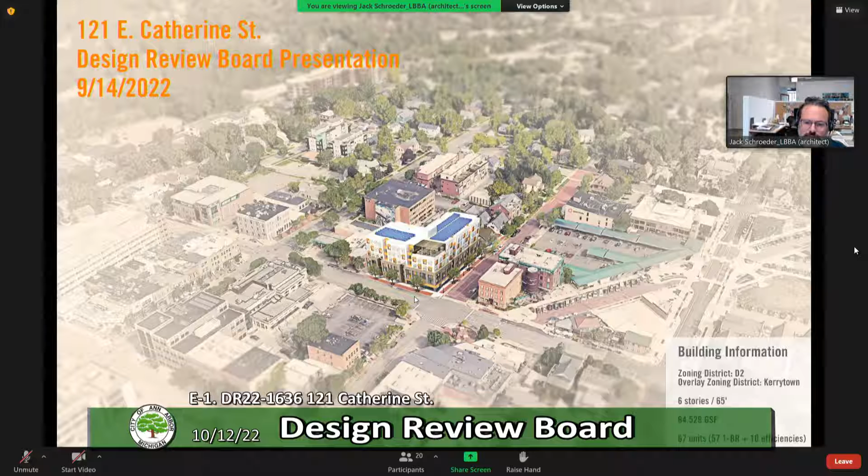A few photos - I'm sure you're all well aware of the space, but just to walk through it quickly: this is the alley behind our site off of Catherine. This is the view along Catherine, obviously just a parking lot now with the city, with these low brick knee walls. And then 4th Ave is the historic brick street with two entry points to the existing parking lot, and we're eliminating one of those.

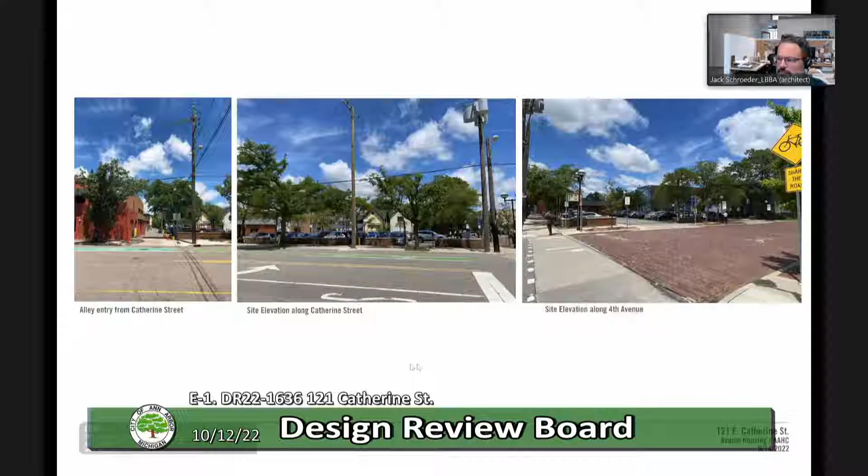These are just more broad context shots - the idea of scale, the idea of material, even the way the openings march down the facades was something we were looking to pull from, not necessarily replicate, but have a similar kind of rhythm at our street front.

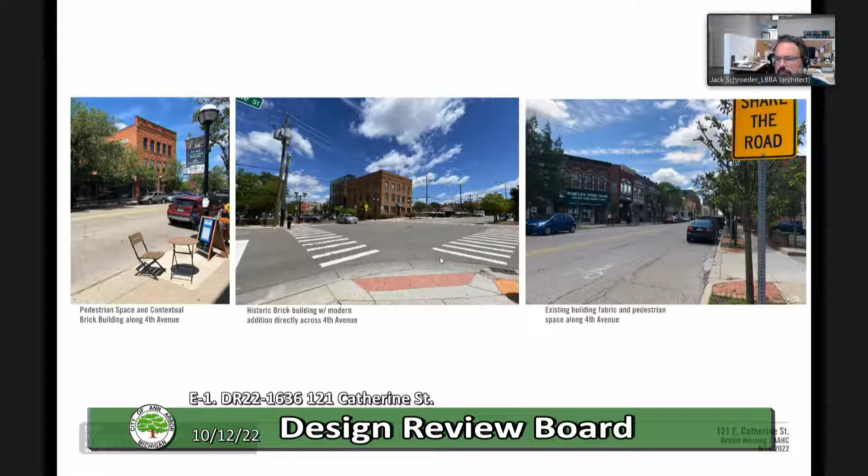Jumping into some imagery, we have masonry up to the 3rd floor, and then the building steps back. The additional 3 stories above are more modern, a mix of white and some kind of bright pop of color. At the base, we know we're a larger building filling up this corner, so we've broken the mass of that brick portion down in different spots along the facades.

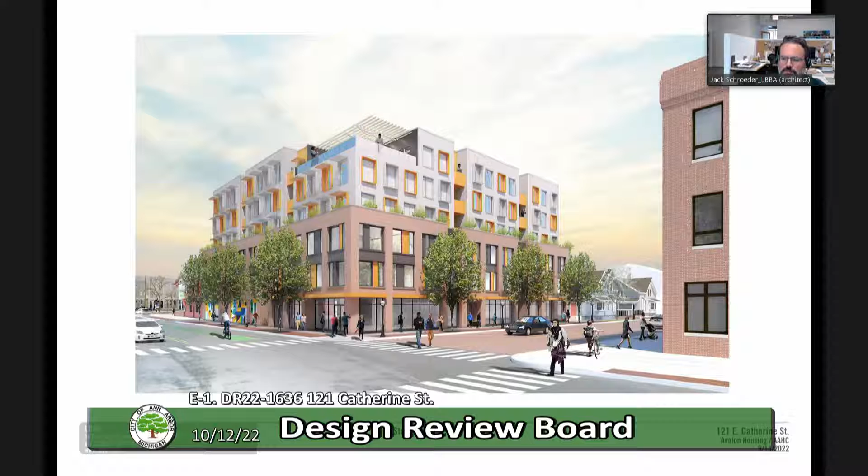This is that kind of repeating window bay. We've made the windows bigger, a little more modern, a little newer, but we're still doing this repetitive rhythm. Obviously, we're doing as much storefront as we can at the base, acknowledging the vibrancy of the surroundings.

I'll keep marching through here. This is a bit more above our site, highlighting the roof deck and community room that residents will get to use. It's kind of rare in affordable housing, but we're actually providing some private porches and a shared porch - people will be able to access these lower pieces as well. We love the idea of providing some connection to the exterior for these future tenants.

This is maybe a little overambitious on the solar up here - once we finish our mechanical design, we'll see where we land. But obviously the building is going to be all electric, highly sustainable, partially to fit within Ann Arbor's guidelines, but we're striving to take it even further. So we're really excited about that as well.

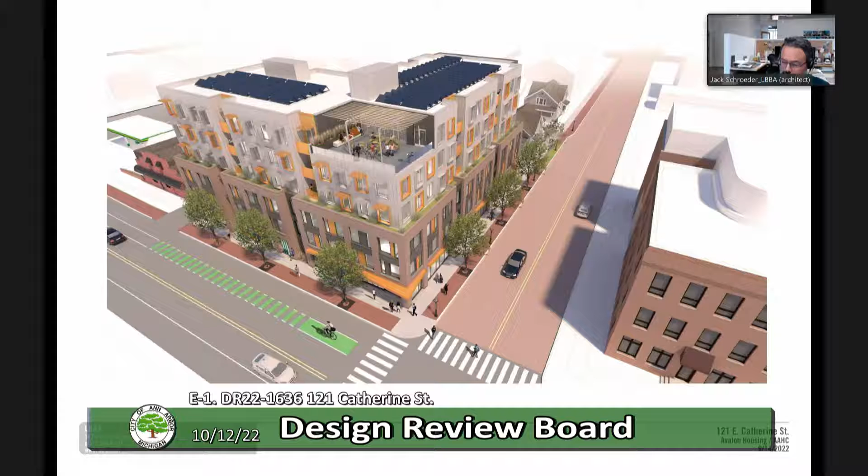Just to jump into the site plan and planning a little bit, the front corner is the resident public and shared space. Both are entered off of Catherine. This just has fitness, community space, supportive services, offices, kind of all the things that the residents living above will need.

The lavender space here is the future question mark space that Jennifer was describing, that we're working with the local group to decide what the best and highest use for this space will be. But it's going to be sort of outside of the resident uses, or could be isolated from them. We pulled the building back off of Catherine a little bit, just to provide more breathing room there. It also helps with our open space.

We think there's some opportunity for whatever activities are there to spill out onto the sidewalk over time and enliven that stretch. We've studied multiple site layouts, parking layouts, and have landed on this straight shot through off of 4th through the alley. The parking as it's drawn now is going to be all public. Even though it's within our building, it's really meant to serve the Kerrytown district, the larger district. And we have this connecting path that will let out towards the market. Obviously, we'll meet all of the EV charging requirements and EV ready requirements.

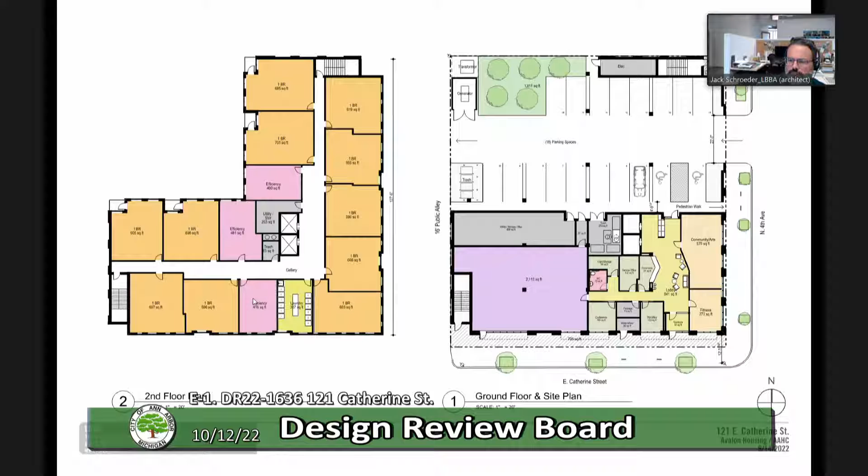So moving up through the building, these are the elevators at the main level, getting you up to the 2nd and beyond. As I said earlier, there's mostly 1-bedroom units with a few efficiencies sprinkled throughout the building. Shared laundry.

3rd floor is nearly identical. We added one bedroom. And then you see at the 4th is where the space starts to step back, and this is where the rain screen, the white facade, starts at the 4th level. And continues to march up through the building, doing our best to stack and be efficient with the structure and how the building will work.

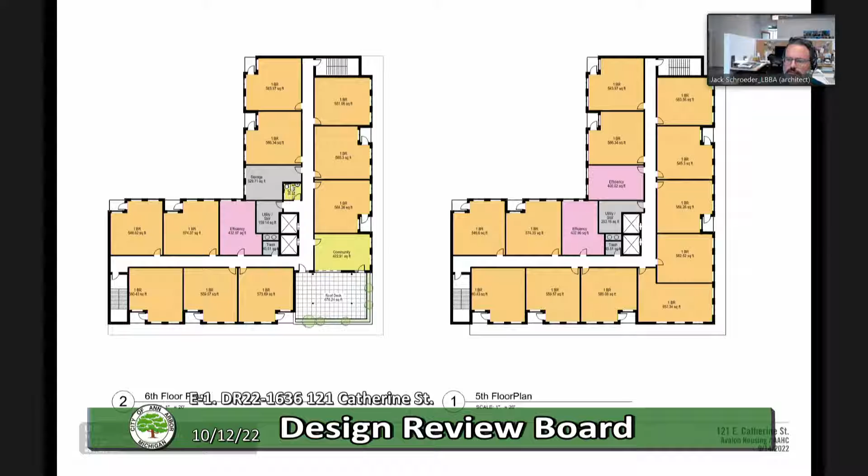And then landing at the 6th floor, this is where you see the community room that spills out onto the roof deck with a shared restroom at this end.

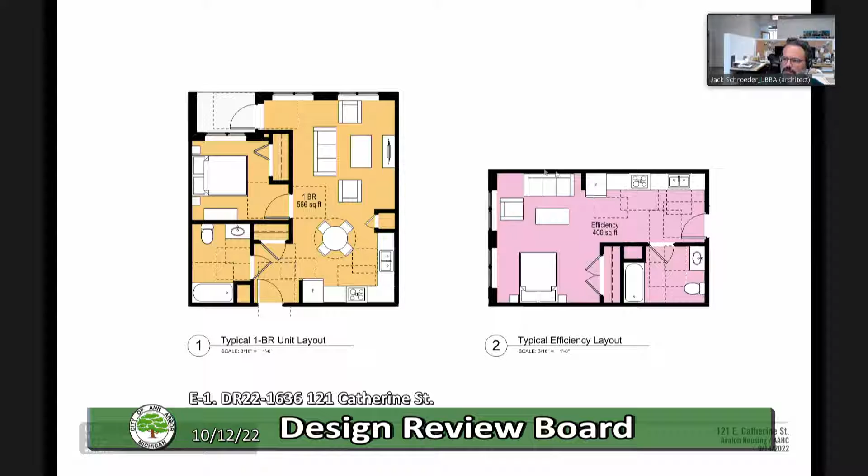Blow up of the typical residential units. There's some fluctuation, but these are kind of the simplest plans. Modest, efficient plans, but also give a nice sense of home. Like I said, the one bedroom has the porch here, a lot of light, this kind of shared open living and kitchen space. And likewise in the efficiency, there's a little bit of a kitchen bath zone, and then as you get out towards the facade, there's some nice light and a large open space.

In the elevations, there's not much more to talk about than what I was walking through with the 3D imagery. This just gives you a sense of the masonry up to that third level, and then this portion above. Here's your roof deck.

The rear facade, we're kind of expecting that we'll go to more of the material that's cladding the upper floors. At our side facades, we're dealing with being pretty directly adjacent to the neighboring property, so we've got some fire considerations. So these facades do end up being pretty solid, but we do still want this nice cladding. We're even picking up on some of those bay moves, just through masonry relief at the sides.

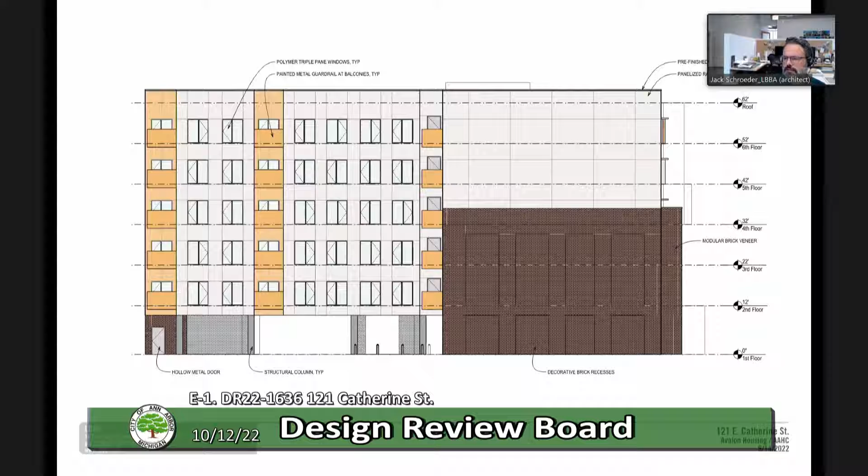Building section, mostly this just shows we're proposing a basement for service space, storage, all the things these buildings don't always have. This is a little additional breathing room, we think, so they can continue to use the space well. Here's the step back, roof deck. Just gives you a little sense of how the building will work.

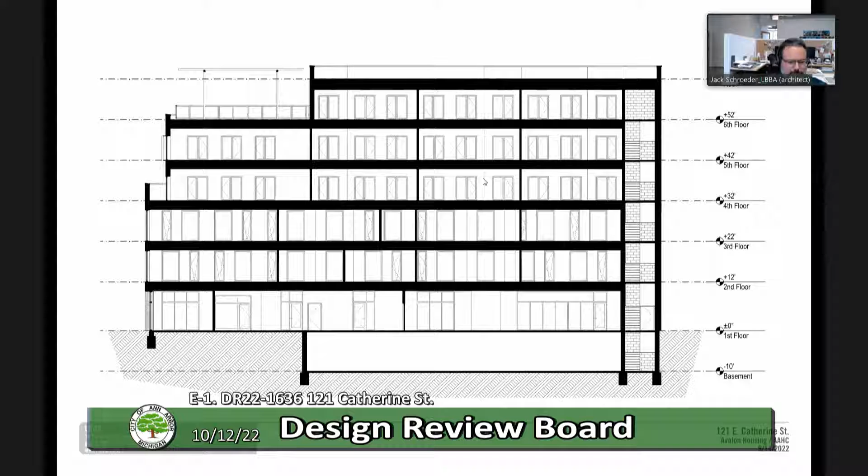And then I wanted to share with the group, the renderings that we showed were from a previous package that we had sent to Jeff. This one updates and shows that parking entry on this side. As you guys probably know, the site plan's ever evolving.

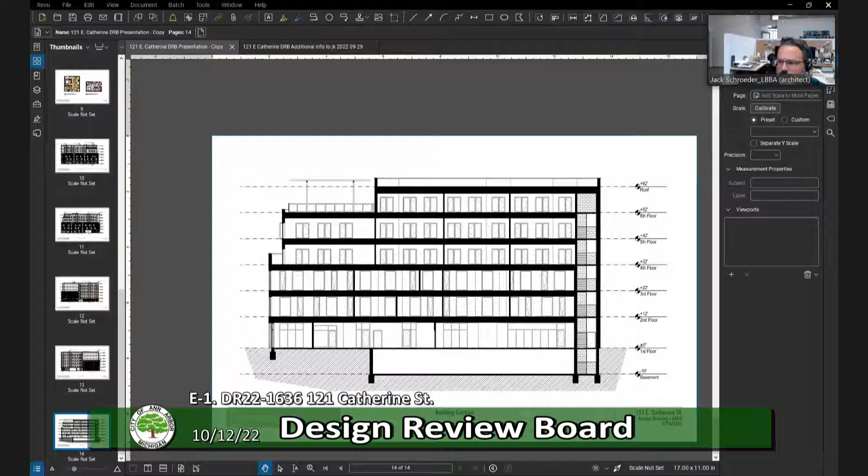Yeah, so Jack, we're still seeing your Bluebeam screen. Which screen? The building section. Oh. Okay. One minute remaining. Do you see this image? There it is. Yeah, okay, that's better. This is just an up-to-date image that we - kind of hot off the presses.

So this shows the parking entry and the storefront wrapping around onto Catherine. Just a few small updates to what you saw in the package that we delivered to Jeff.

And then I know there's some question of fiber cement as an acceptable or non-acceptable material. I will try to rush here. Are you all seeing this image? It's a different building? No? This is interesting - we're just seeing the rendered up-to-date version.

Okay, so this is a project that we did recently, and we just wanted to show you quickly that what we're proposing is not a Hardie type board or Hardie plank. It's an open system, likely a Swiss Pearl or Silbonit. Silbonit is a product that we use, but it's a cleaner system. There's a rain screen behind it. It's an integral system, it's not painted, highly durable.

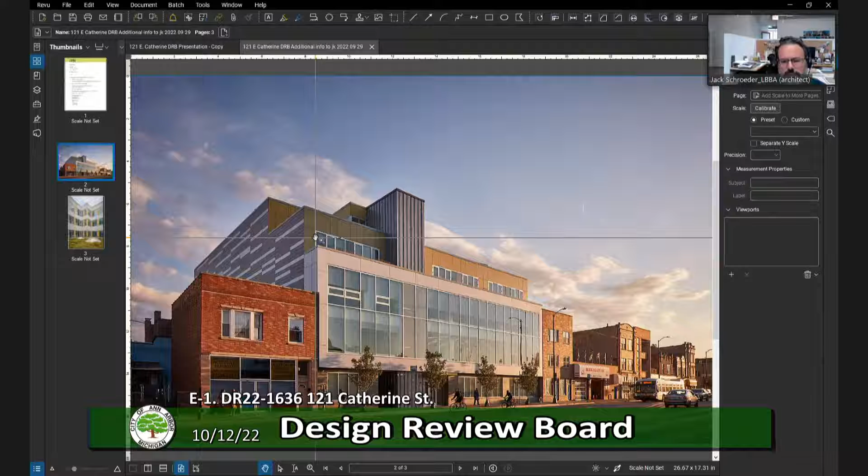So we just had a couple of examples, and we can discuss that further with your comment. This is some more images, and we're happy to share even more if that helps. And I think that's it.

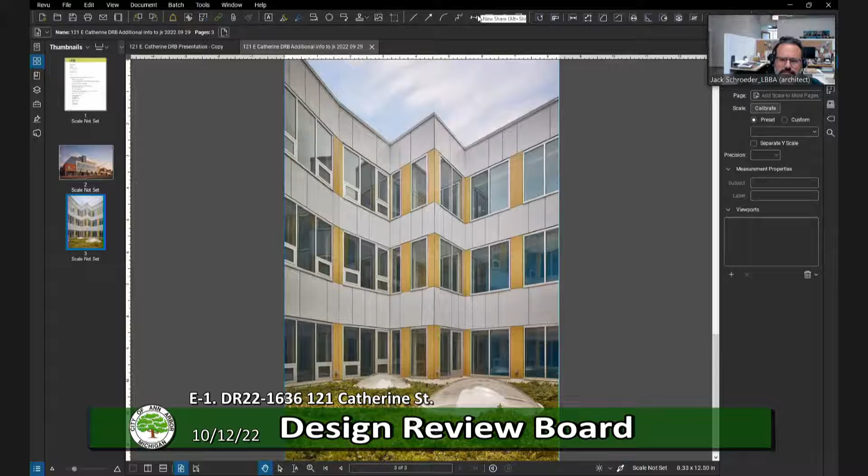Okay, as we head into discussion, I imagine it will be useful to be able to return to the pages of the presentation, Jack, so you may just want to get that up and ready, so as the discussion goes we're looking at what we're talking about. Does anybody want to start off the review board discussion?

I guess I'll start by saying that the staff comments mentioned the windowless facades on the north and the west, and I was wondering what your response to that is and what your thoughts are.

We actually want to reserve that space for some kind of art. I'll let the architects talk about the building reason for it, but we don't want to leave it exactly how it is. We want it as a future art project.

Our stairs are moved to those two sides as well in plan. We're also dealing with a higher level of fire rating at those zero lot line conditions, so we could penetrate those, but we'll have to look at much higher rated glazing.

Our tact was to make those solid, and like Jennifer said, hopefully use those for some form of public art. We're not going to downgrade any of the material—it'll still speak to the rest of the building.

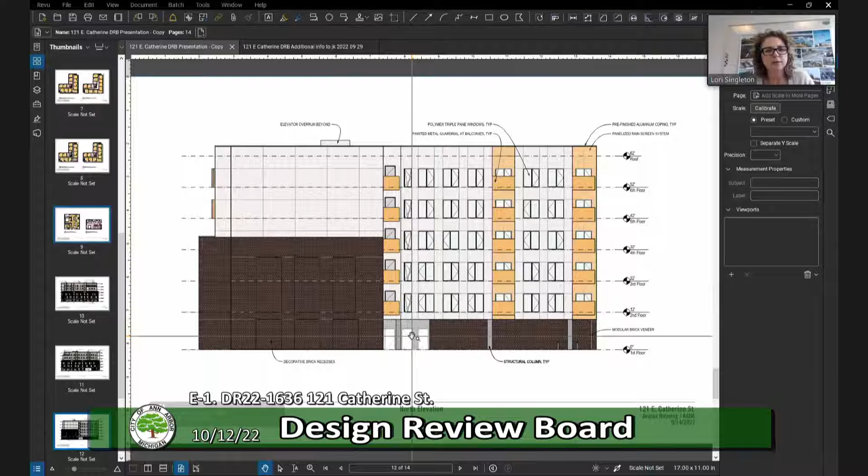Jack, can you please go to the site plan so everyone can see what we're talking about? I think, Lori, I take your point, that we need to program that a bit more. If we think about seating, possibly a little shelter, something that can occur back here, for better or worse.

I know, Jennifer, we've talked about this could likely be a place where people have a smoke. We need to situate that, and we'd rather it not be on the street. So our thought is that this becomes sort of a yard for the resident group. But you're right, for now it's a bit of a placeholder where we're really just trying to hit our square footages.

Just to clarify, that's all public parking, is that right? So it's also a public gathering spot? That's not for residents, from what you said. Correct. It's the whole fully—

So it's currently, as you probably know, a public parking lot. As part of our community engagement process from a couple years ago, we heard the whole spectrum, from you shouldn't have any parking on this site to you need to preserve as much parking as you can, don't get rid of any of our parking, but we support affordable housing here. So we're trying to compromise and meet all those expectations by preserving as much parking as we can. It's actually going down from about 50 spaces to 18. We might be able to get up to 19 or 20 as we reconfigure things, but that's really what we're trying to do—keep as much parking as we can while making it a space that makes sense for the residents as well.

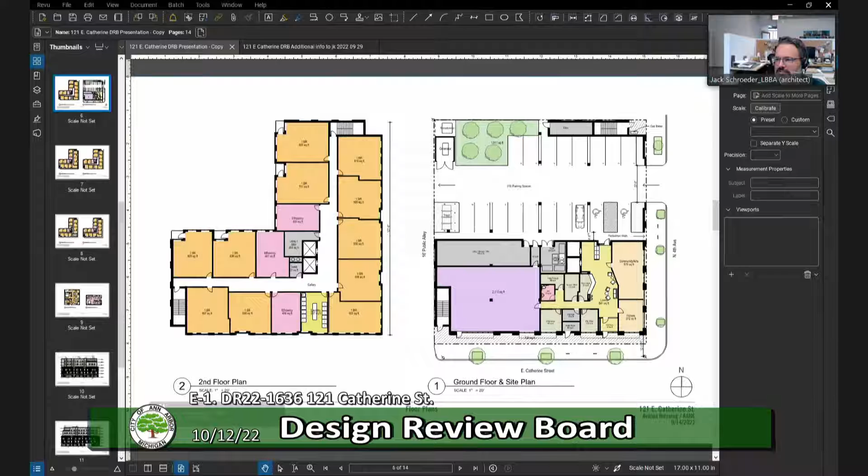This is new to me. It feels like the format's a little different. There we go, okay, there you go, oh, we got it.

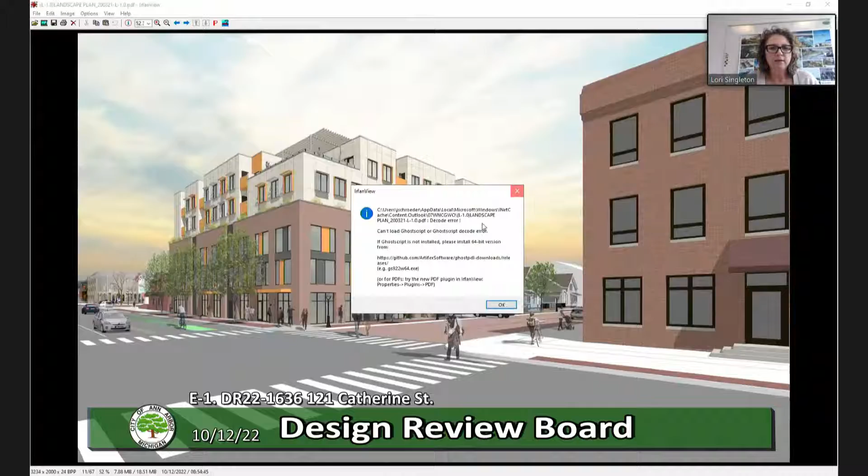I think in general it does respond well to its context. In terms of the scale of the lower portion of the building and the lightness of the upper portion, to me they are two very different buildings.

The bottom section has very nice proportions. I like the treatment of the windows, the patterns you've developed. The top, aside from the yellow, really has not much in common with that to tie the two together. So while I think the distinction between the base and the top is nice and helps it fit its context, I wish that either the language on the bottom could extend a bit more on the top or vice versa, so they worked together more cohesively. It almost looks from this view like you're looking at a different building that's behind this building.

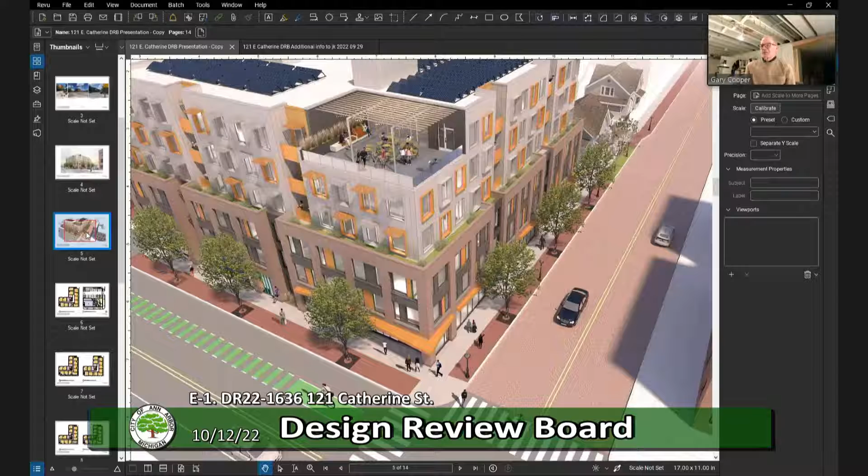That was the intention. I agree with that a little bit, and or quite a bit. It's almost like when you look at the lower facade, you're looking at the charcoal gray and gold or orange building slightly behind the brick, and you might think of the upper part as being the same charcoal gray and orange extending up.

Instead of such a drastic difference between the very light palette on the top and the darker palette on the bottom. Gary, are you suggesting that the concrete panelized system be a similar value or color to the gray? Is that what you're saying? I said that might help, yeah.

Mm-hmm. Yeah, I had some of this, I had a slightly different take on this. I understand what you're trying to do with the color and pulling it down, but I agree with the comments that were just made, that it seems a little, it's like a gesture.

I think you've put in a little bit of nice detailing into the brick, which is very contextual with what's around it, but it's also not, it's still modern, but I appreciate some of the detailing you put in, the capping and a little bit of soldier course at the bottom and the sills. I would

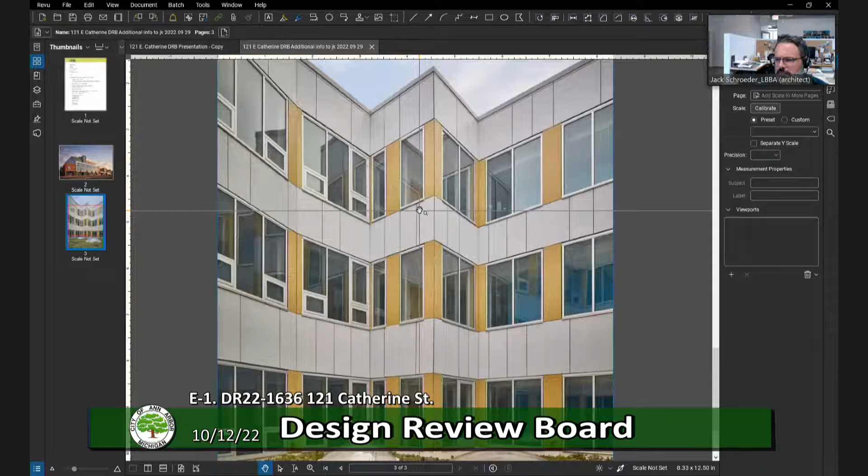Yeah, both options are possible, Gary. We have done, the interesting thing is these are exposed fasteners on this project, and you really don't even notice. They match so closely, and it's a full shop drawing process, so you don't even really pick up on them, and that is a more affordable option. So I expect that we would expose fasteners, but it would be in keeping with what you see here. They come from the manufacturer, they match, they're durable, but they do have a hung option. The system just gets a little deeper and a little more costly.

I do like projecting frames on the upper level. Just as a question to relate to what I've seen already in town, is this system, the rain screen system, similar to what Fitzsimmons is building on Miller or the Morningside development down in Lower Town? Are those rain screen panels? Is that how you define it?

I'm asking the rest of the panel, because LBBA may not be familiar with the two projects I'm talking about, but they are panel systems like that, and I wonder if that's what we're going to be observing. Does everybody know what I mean by the Fitzsimmons building? Yeah, I don't think I know if they are rain screens or not, Bill.

Okay, yeah, they look like large panels. And the Morningside buildings, which are really taking over the corner of Maiden Lane and Plymouth, that's a sea of that same kind of panel. I'm wondering if that's what we're observing. I'm going to pay more attention to those now.

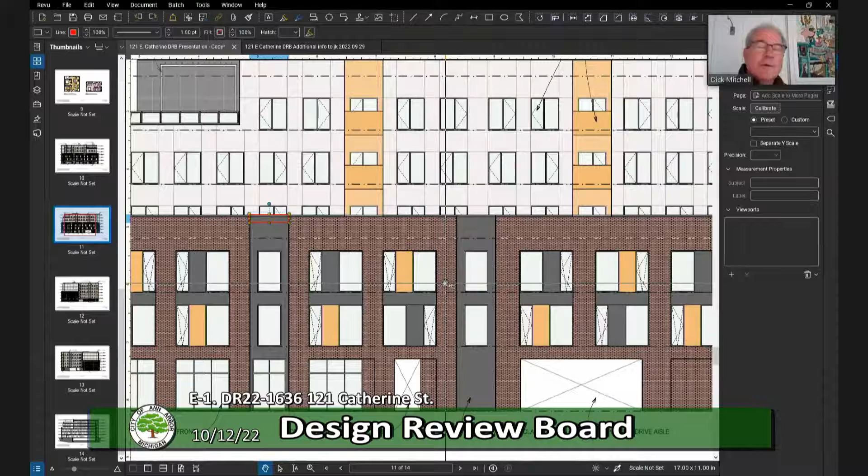But I agree with Dick, same thing—I was like, shouldn't those line up? And then it's like, no, they really shouldn't. There is an intention to the two pieces feeling different, but I hear the group—there could be more of a tie, whether in proportion or color. We can continue to refine that.

Has there been any consideration for using the open space as an alternative usable public gathering space? Because there is some of that around the neighborhood, using it for stormwater management and collection. It may not cover all the quantity, but to have that as kind of a performing landscape within the project would be a nice demonstration, bringing some more intense green to the area.

I think that'd be great, Lori. I think it doesn't, from my understanding, hit their mark for what open space is—it needs to be sort of usable, right, Ashley? Or at least occupiable. But I think that'd be great if it could be a little more depressed, and have sort of a rain garden piece, because we will have some stormwater work to do on this site. It's pretty tight, there's not a lot of open area here, so we could ask—but at least from what we've heard so far, I think they want it to be occupiable.

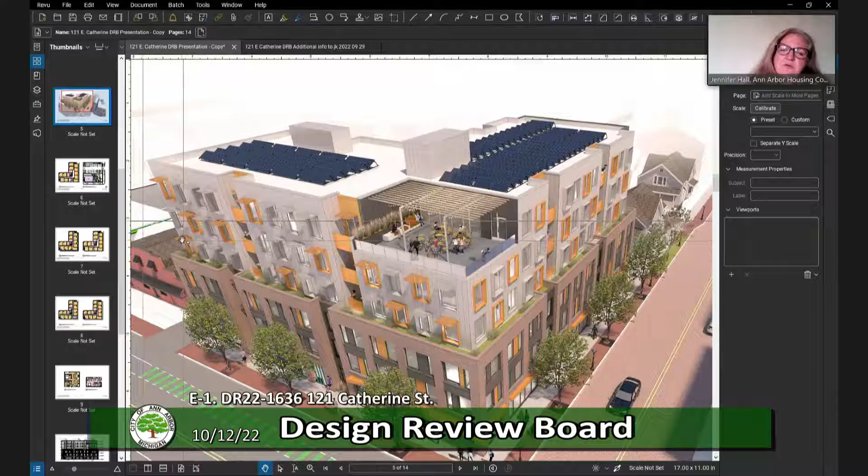Yes, that is one of our design ideas and use of space ideas. We're still working with the community to see if those ideas hold and if that's what we want to do. So that first floor space that's not dedicated to residents could be gallery, cultural space, a mixture of different uses, or additional community space. We're looking at the possibility of having half the units dedicated to and reserved for people in the creative field—you don't necessarily have to be making a living doing that, but people for whom it's something they're passionate about. So yes, this is that site.

Awesome, I think it's great. In any event, to me it's a spectacular project. I would tweak the top of it a bit, but the pluses far outweigh any small criticism I might have. I love the recessed bricks as kind of a public art gallery, and would encourage you to test out a rotating gallery along the lines of Embracing Our Differences. So that's all I have.

Thank you so much. I apologize, I have to go pick up my wife. I'm so sorry, but thank you for including me. This is awesome. And by the way, with the Art Commission, we're willing to help in any way we can, to suggest ways of how you might want to deal with it. Whatever we can do, we stand ready to help.

Well, thank you so much, appreciate it. Thank you. Hey, John. Hi, John. Hey, John.

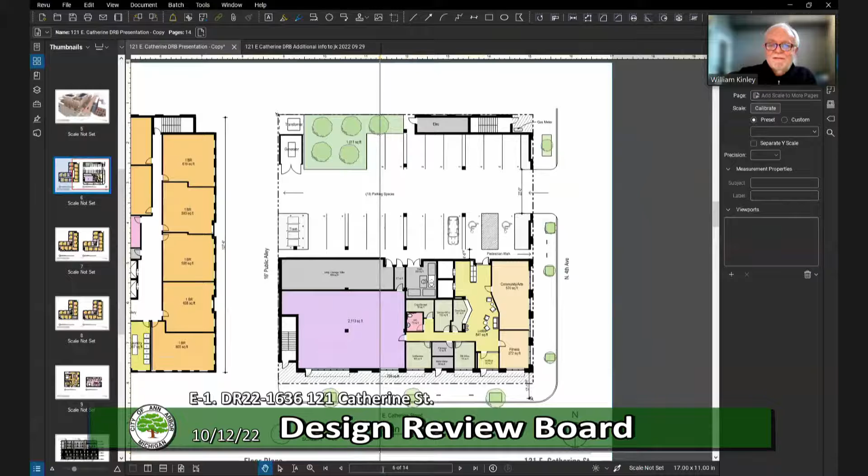I have a comment—I'm sure the outlier here, the non-architect in the group—but back to the comments about whether the upper floor should be darker, I'm going to go against the grain and say I appreciate that the upper floors are lighter, in the context of something else on that block, the project that goes from Main Street over to 4th.

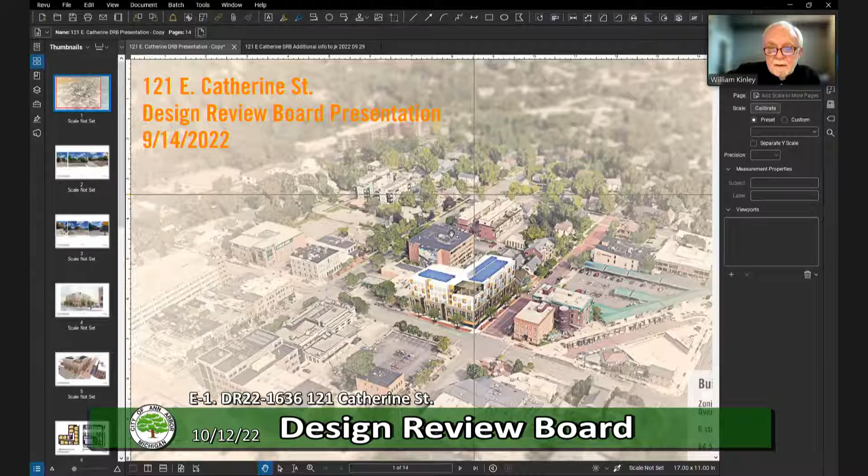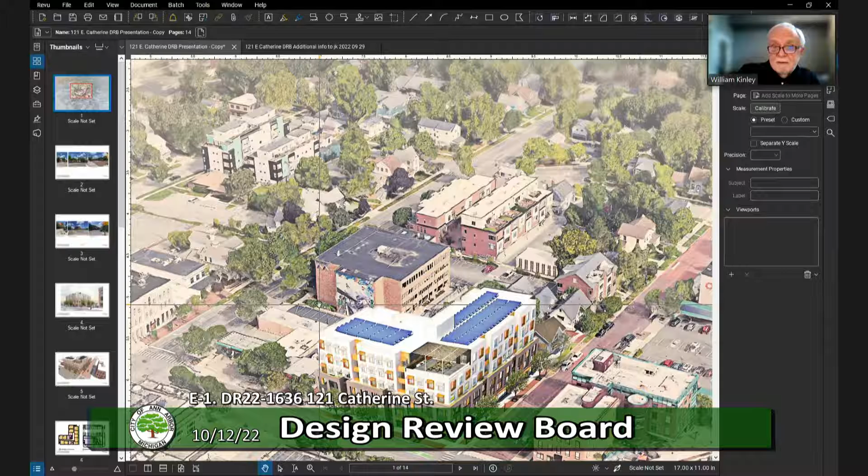That Fitzsimmons had developed, the buildings facing each other northwest of this building on the same block, have a lower part that's brick and an upper part that's light color. Driving by, I've always mentally thought that's actually pretty cool. During the day, the light upper floors tend to fade against the sky; if they were dark, I think they would loom. So again, going against the grain, I like that the light colors don't dominate—the brick really stands out, and the light colors fade into the sky during the day. I would hate for this project's upper floor to be very dark. I think already it looms, if I can use that term, over the Braun Court to the north and whatever building is to the west.

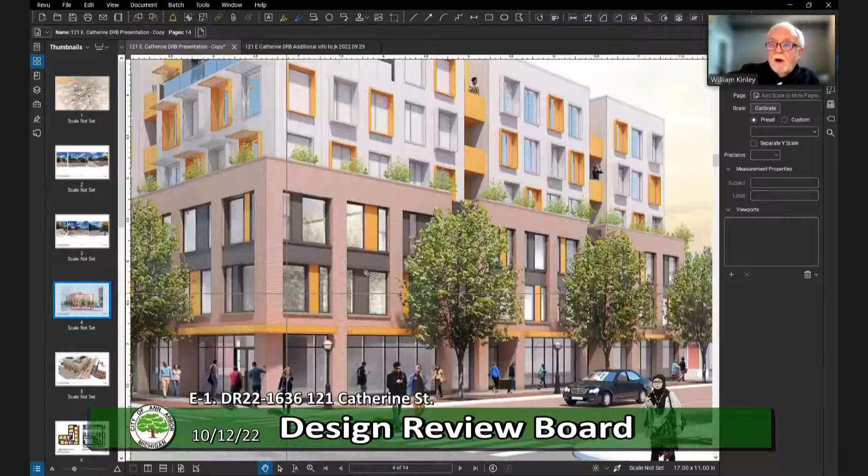Just for what it's worth, I don't know that I'd agree with the whole upper level being dark. Well, I would agree with you on that too. I think it's a solution to tying the top and bottom together, but it has its drawbacks. I would agree that the lightness is welcome when adding that much mass to this intimate neighborhood. Is the solution to bring the white down to where the gray is, as opposed to bringing the gray up to where the white is?

I would say not—I sort of like the dual existence too. I agree with Bill that this neighborhood was warehouses and grew organically as the need arose, so there's a bit of a hodgepodge. The marketplace building across 4th has the white swan element, and a more contemporary building behind with the silo element—it's a nice mixture of architectural elements. So I agree, I like it the way it is, and I like the tie of similar color from the lower 3 floors to the upper 3 floors.

Those two elements are so different, but the orange color, if it stays orange, is a really good tie between the two. I like the solution. I think it works pretty well and is responsive to that warehouse district of Kerrytown. It seems like we all generally really like this project, and it's just some balance of how much they tie together.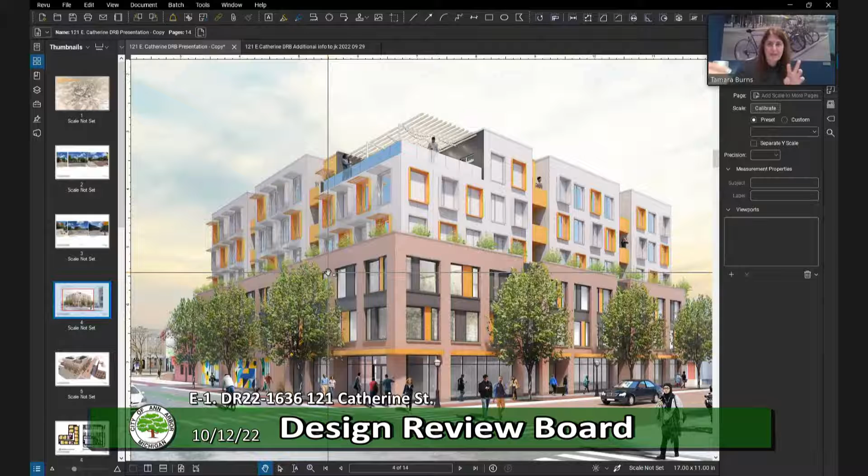I've been thinking that orange at the lower level, especially with all the art you're talking about, seems like it's going to be quite busy. Not that I dislike what I'm looking at, but it seems like you're going to have art all around, which will be wonderful, or awesome, as John says. But I think we have some ideas.

I think these are all, there's some different perspectives here, but I could see less of the orange at the lower point, so there's still some tie, but maybe it's a little jumpy as it is. And Lori, when you were talking about the upper level, maybe a little bit more about proportion - these are kind of punched openings, whereas the first floor has these tied together things. So maybe they can speak to each other a bit more, but then there's also support for them feeling kind of different. So I'm hoping we can land somewhere in the middle.

I don't mean to misinterpret what we're hearing, but I've got some ideas personally kind of brewing. One thing that you mentioned, or maybe this isn't what you meant, but that's been in my mind, is the kind of thickened frame around the punched windows having a similar response to the edges of the brick on the lower level - something where even if it's a different proportion, the detail kind of picks back up in some way.

On the color, I think this looks like a very quality building. It looks like market rate housing. It doesn't look like affordable housing like you're seeing pop up in other cities. The one thing that makes me hesitant on the color is that it's one of the things I feel like I'm seeing over and over again in Chicago and elsewhere, this kind of 'oh, we'll make it playful and you'll think it's nicer than it is somehow.'

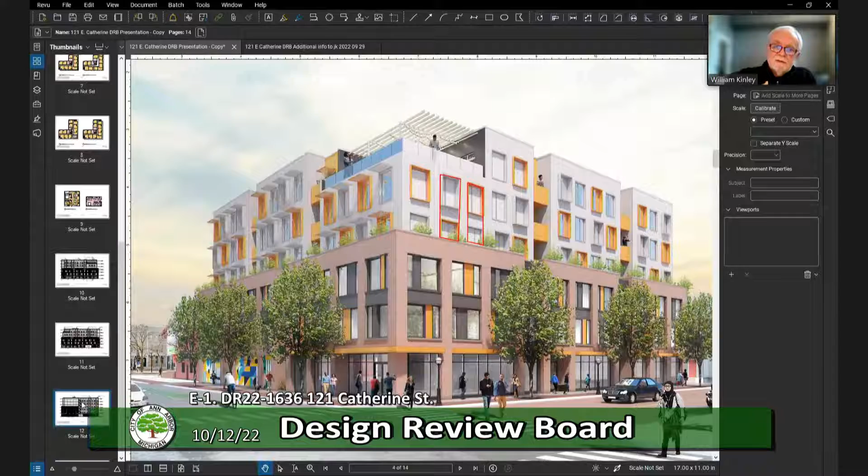If we go back just for a second to the north and west facades - those two solutions you've mentioned, correct me if I'm wrong, on the left-hand side, the brick with the panels above, those are basically all in the same plane, aren't they? Right at the lot line? There's no setback? The north side, yeah, aside from the backyards of the buildings there. At the alley side, they're more visible.

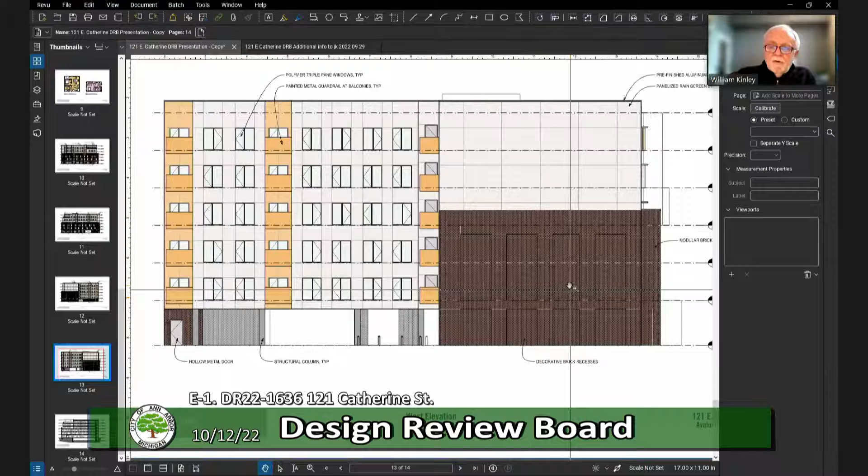So those are a more likely sort of art space. I know there's discussion about having art on those upper floors. Having a mural just done recently on the west side, you have an alley, you could run a boom truck up from that and do some work on it. But you're going to be able to see that from Main Street - you're going to be able to see that upper part.

That part is going to be very visible from Main Street over the adjacent buildings. Same thing to the north - the buildings on Braun Court are basically story and a half buildings, they go up about to that point, and that's it. So the main view from people coming and going from Kerrytown is this wall that's going to be - you can run a swing stage or something and do a mural in the upper part, but...

I'd like to see Jennifer and everyone else address just what will happen on that wall, particularly in the upper part of the west. If it's guaranteed to be a mural, that's great. If there's some other kind of system, I'm not an architect, but something that will make sense. I think John Kotarski made some suggestion - maybe he was talking about those recessed brick panels there, or some art or something to break it up. But that should be an interesting feature.

Certainly on the west, the lower part's going to be against the alley and other buildings, but that north side is going to be very, very visible. And it's worth spending a little more time letting us and the public know what's going to be there.

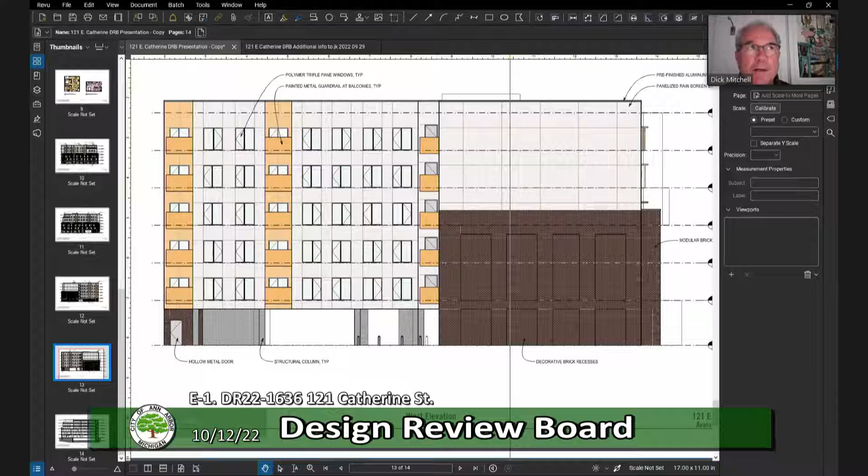I have one more detailed thing. The storefront along Catherine and 4th appears to be rendered in a way that the frame comes right down to grade. You might want to consider a bit of a knee wall there, since salt and other de-icer chemicals could be pretty rough on an aluminum frame. Typically you'll see a 12 or 16-inch knee wall where there aren't door openings. Good point - it helps with electrical inside and a number of other things too, plus drainage planes. So I think sometimes it's hopeful - we like the idea of it going to ground, but it's not the most rational move.

I think it was Lori who brought up that it'd be great to see a view like this looking from the north, because I really do wonder about the impact on Braun Court to the north. That was Tamara - sorry, we don't have that. We just didn't develop those views yet. As some of you probably know, these views can eat up time to get them just right, but we will rotate around. I think that's a good idea.

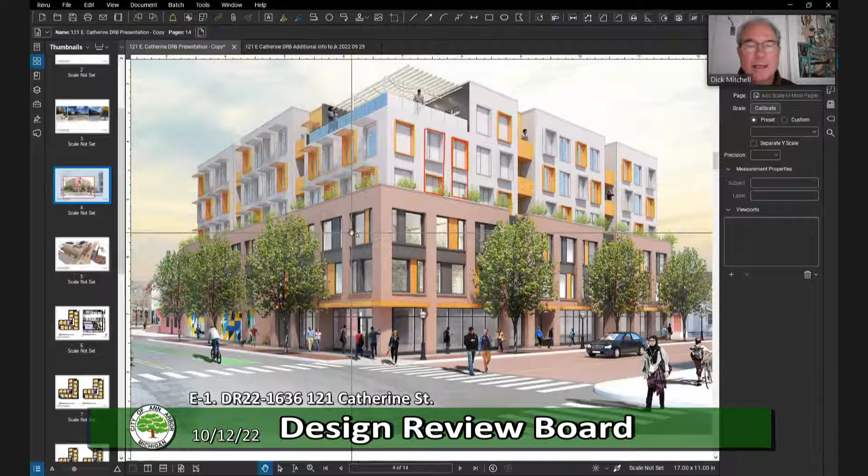It'd be a good thing to have for planning at your next meeting. Okay.

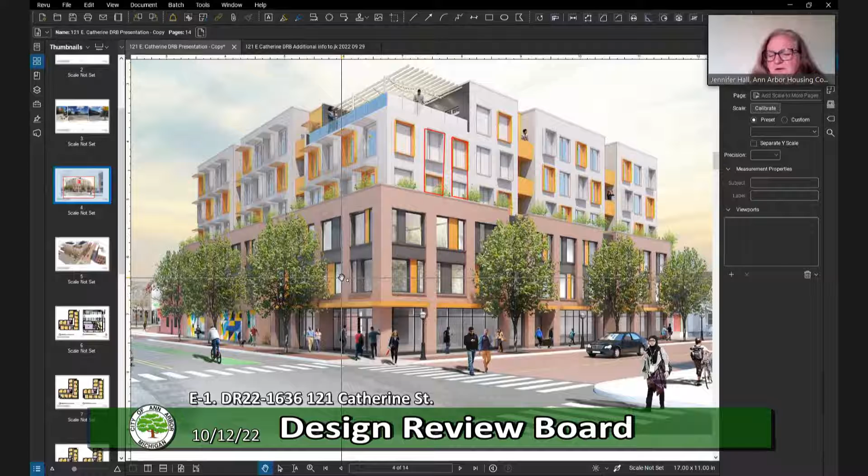The main reason we have the 0 lot line on that north side is due to the DTE power lines that you can't see in this rendering, which are very close to where our original building design was. For safety reasons, we wanted to step it back away from that Catherine curb, which pushed us closer to that north lot line where we originally had an alley. Now that alley is moved into the middle, between the parking lot area and the building, which actually made it a lot more functional, we thought. It just made more sense when we did that.

I'm really glad you pointed that out. If those power lines are there, then we're not planting trees underneath them. Can you think about that streetscape, having more green at grade with the path on the inside, because otherwise it's going to be just hardscape. I think the trees alone would have been nice, but you're probably not going to be able to do that.

That's a good point. One of the Braun Court buildings looks closer to our property line than the other. Worst case scenario, that one is just over 3 feet away. But the more typical condition is more like 10 to 16 feet.

There were previous versions, not that this is any relief, but we looked at something like a U-shaped building, or something even more densely packed, and at least wanted to allow that court to exist at the back and stuck to the 4th and Catherine sides.

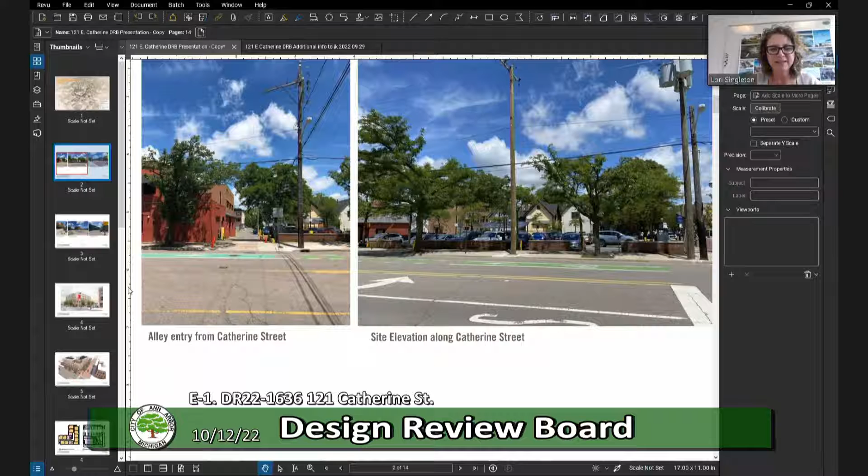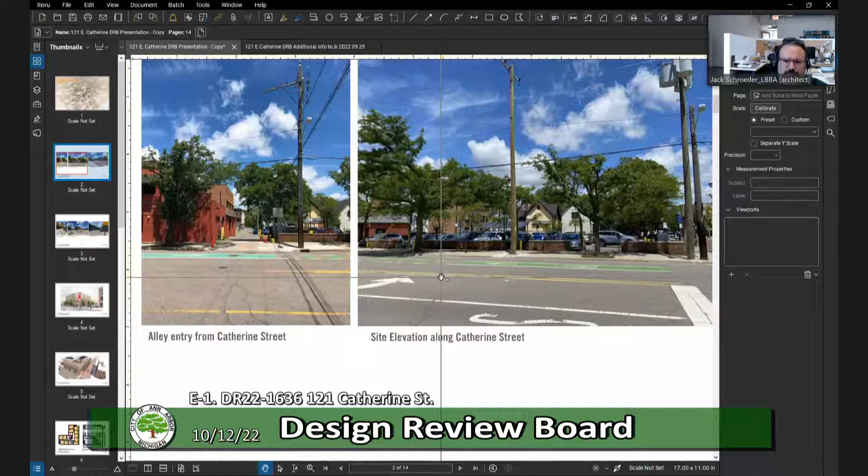Lori, are you saying you don't like L-shaped trees? I don't think I've ever met an L-shaped tree. I'm just looking at the one where DTE probably cut the branches out so it looks like an L. Yeah, I saw one today that was like a T. Beautiful fall color right now on the T-shaped tree. I think it could be kind of a cool design problem though, to figure out something low scale, not tall, some sort of shrub that's still not going to threaten the lines, some raised planters or something. We'll have to work with the DDA on it.

Anyone else have comments or questions? We can open it up to any public attendees. Nice job.

I just wanted to have a chance to briefly summarize my staff comments. One of them had to do with material. I'm going to encourage LBBA to look at the code sections of the Unified Development Code, which refers specifically to materials that are permitted in this particular location and which are not. So I'm going to encourage you to look at those.

With regard to the blank walls, I think the western wall would be really ideal for a public art display, whether permanent or temporary. The north wall is more challenged, it's right on the property line. I think it would be really hard to do art on that side, and hard to access. So that western wall seems more appropriate for that type of display. I also want to point out that there will be challenges to constructing a wall directly on the property line unless you have permission from the property owners to the north to use their property for construction.

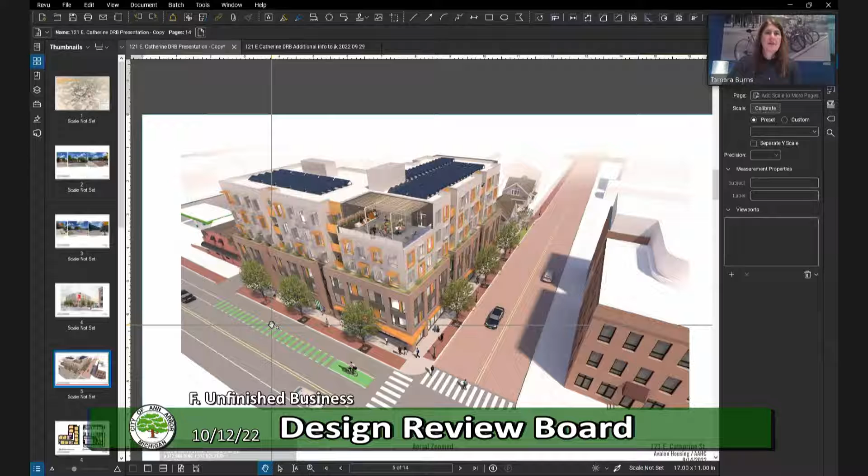So with that, we can move into—I guess public comment comes later—next up is unfinished business. Do we have anything under unfinished business? I think we typically have a public comment just for the project right now, and then general public comments at the end of the meeting. I thought we had two, but the agenda does not outline it. Oh, okay, yeah, we did build that in, so we can follow up on that for next time. Do we have any unfinished business?

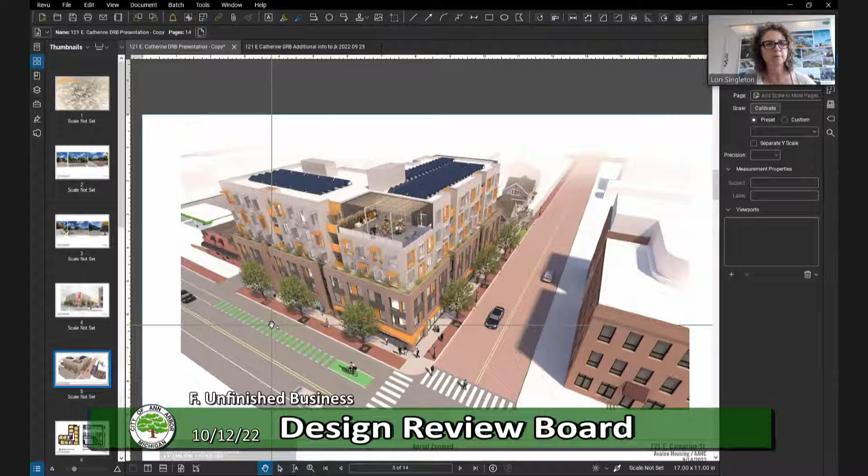Okay, we'll move on to communications. Anything on communications? Nothing for me. All right, so we are following up the project with a public comment period.

Is there anyone who would like to raise a question? You can raise your hand. I'm not able to even see who all is on the call. There don't appear to be any additional callers at this time. Okay, all right, I'll just give it one more second, make sure we don't have anyone calling in on the phone line, which might take a little bit of time to get orchestrated.

Lori, while we're waiting for that, let me know if you wanted me to summarize what I heard in terms of board member comments. I was going to summarize those comments immediately after the meeting, and then you all could say yeah, that summary is accurate, or no, why don't you add this. I think you could all sign off on that. That was what we were doing a year or so ago when we had done this. Let me know if you want me to do that.

I would think that would be beneficial both to the project team and to the board members, and anyone from the public, to just kind of get a conclusion, since we always have a little bit of back and forth on different perspectives.